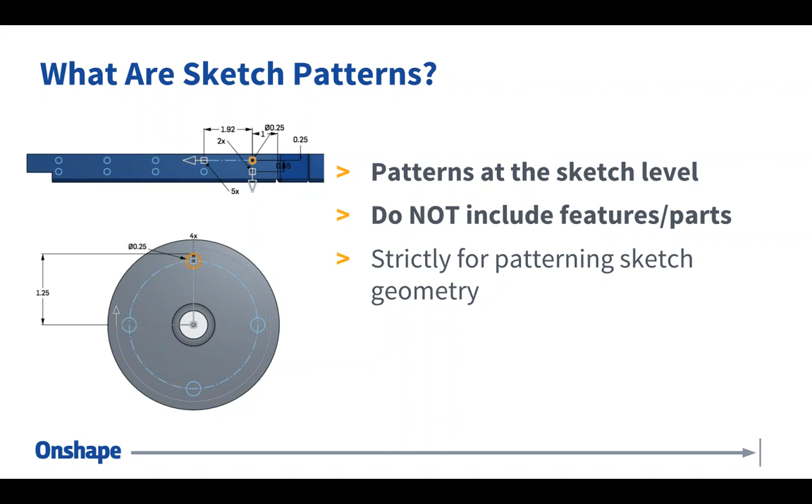It's important to keep in mind, though, this does not include, we're not going to be talking about patterning features or patterning parts. We have done a different webinar on that, so definitely check out our YouTube channel if you're interested in past webinars on patterns. Today, we're focusing solely on patterning sketch entities.

So, why would I need this? And the question is valid, and it gets asked a lot: why would I use a sketch pattern versus a feature pattern, or why would I use sketch patterns at all? I think for a lot of users, they want to be able to repeat not the feature, but the actual sketch entities that drive them. And anytime you need to repeat sketch level geometry, you're going to need a sketch pattern tool of some sort.

Now, it's important to point out a lot of what I'm going to show you here today can also be used, could also be created using a feature pattern. And there is a lot of overlap between the two, a lot. So I would say for many users, it boils down to, in many situations, a matter of preference. Having everything in a sketch, a lot of users like it that way, and therefore use a lot of sketch patterns. But understand that, again, if you need to repeat geometry at the sketch level, then sketch patterns are the tools you're looking for.

And I think the real thing is if you find yourself manually sketching the same thing over and over again, or similar shapes over and over again, and find yourself positioning them and rotating them and doing all these things to try and get them in the right spot, chances are there's a pattern tool that will allow that to be faster. It'll make it a little bit quicker.

So, question: as in CATIA and others, I assume you may be referring to sketch patterns, and sketch patterns are a common thing in many CAD applications. CATIA, SolidWorks, Inventor, almost all professional 3D CAD applications have some level of sketch patterns, and I'm sure if you have familiarity with one of those applications, a lot of this is going to look pretty similar.

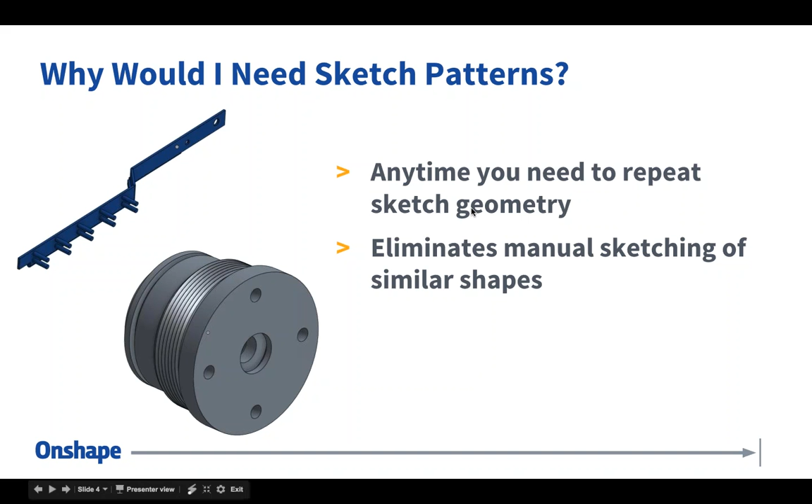Do sketches have their own extensions? If you're referring to file extensions, the answer is no. There's no files whatsoever in Onshape.

So what commands are available to us? There are a few things we're going to use for patterning geometry, and I've already mentioned the first two. The most common are going to be linear and circular sketch patterns. Like the name implies, it allows you to pattern a sketch entity in a linear direction, or pattern a sketch entity around a cylinder or in a circular pattern.

Now, the last one I want to mention, which is very valuable, is mirror. Mirror is particularly valuable if you need to mirror sketch geometry across—not necessarily patterning it, but you want that symmetric behavior in your sketch. I wanted to mention any way we have for recreating and reusing sketch data, so let's dig into it.

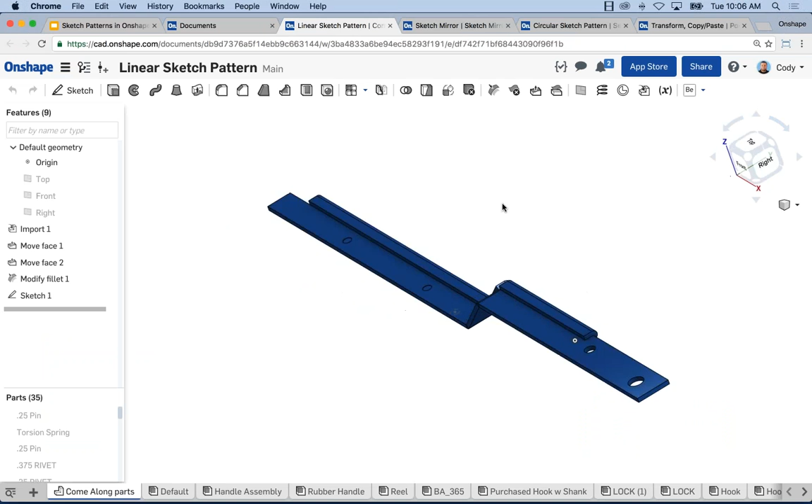Now, the first thing I want to show is a linear sketch pattern. Okay, so we'll start with this simple arm. What I'd like to do is take a hole that I want to cut and pattern it all the way across this arm at a certain distance, a certain spacing, and so on. So let's discuss it now.

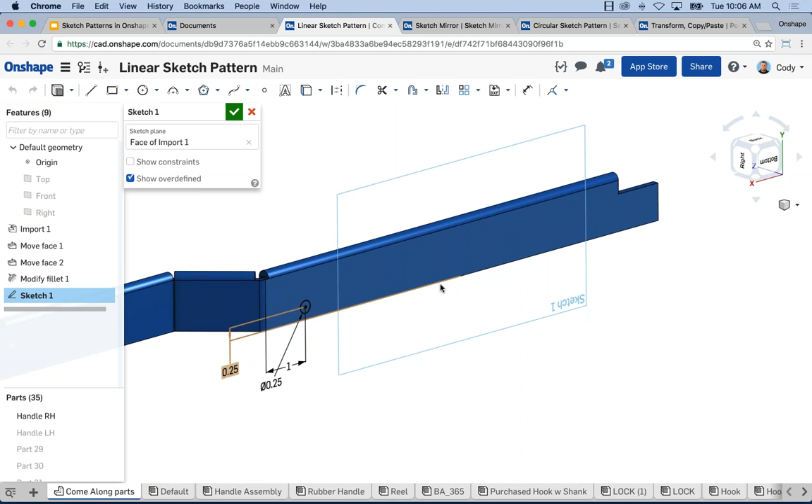I'm going to edit the sketch, edit sketch 1. You'll see it's just a simple circle located relative to this corner. I'm going to take this circle and create a linear sketch pattern, patterning it across the arm. There are some unique advantages to doing this at the sketch level versus the feature level, so let me give you a quick example.

I want to do a linear pattern. You'll find linear pattern, circular pattern, and transform all in the far right of the sketch toolbar here, and it's very simple. You select linear pattern, then click on the things you want to pattern—in this case, just the circle.

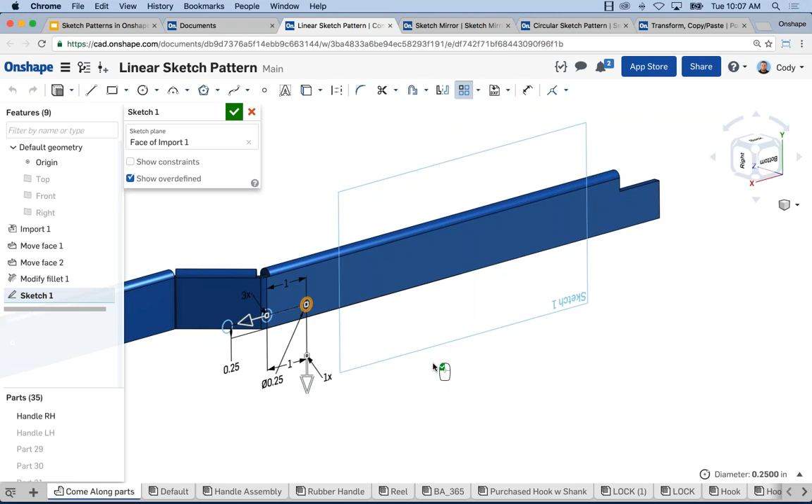Now, immediately when you select the geometry you want to pattern, you're given these arrows and a preview of the pattern. You can see my direction is going this way, and I have a second direction down here, but you can grab these arrows and move them. You can see there are a few details that pop up when I do that.

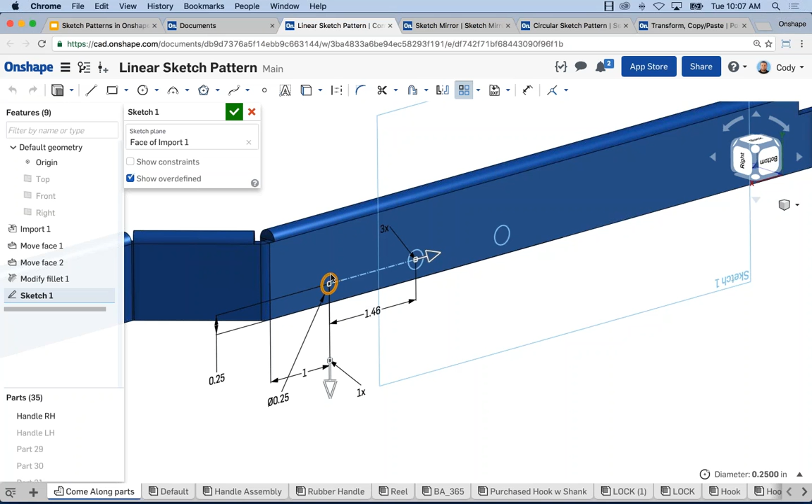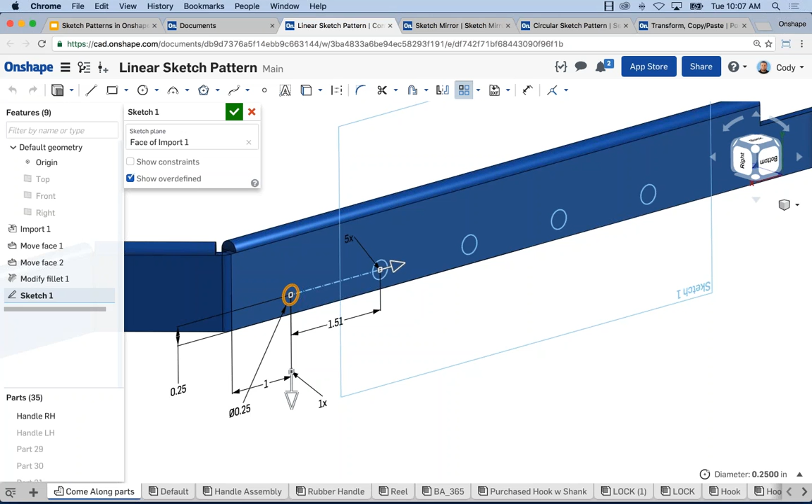First off, I have a dimension here, and a number of instances—3x, a pattern of 3. By the way, that does include the original, a frequently asked question. I have this drag arrow manipulator that I can grab and drag to change the distance between instances. I can also double click the number to change the number of instances in the pattern very easily. So again, the idea is just simple spacing between each instance and the number of instances.

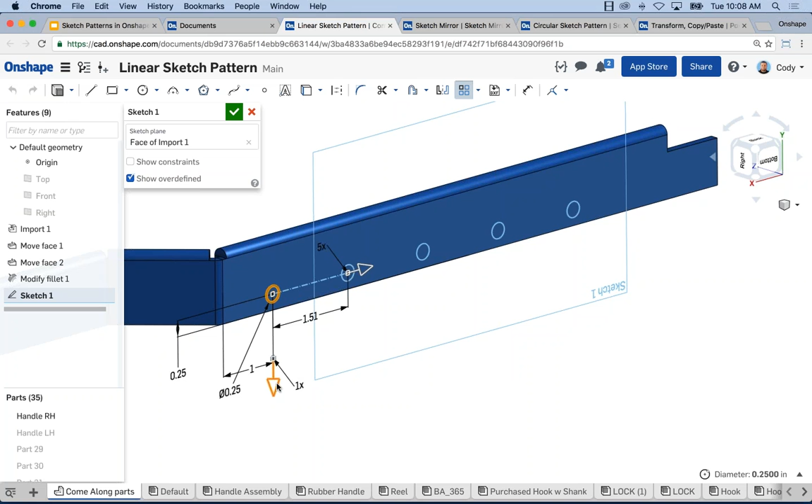Now, a few things I want to mention here. If I want to go a second direction—another commonly asked question—if I want to take these holes and pattern them in a second direction, I want another row of holes, so to speak. How would I do that? By default, in the linear sketch pattern, you also have a second manipulator, a second drag arrow going in the opposite direction. If you left click and drag this, it will assume you want more than one instance in that direction and will pattern those as well.

So a tip if you're looking to go in both directions with your sketch patterns: grab both arrows. The moment you click and drag that second arrow, it will assume you want a second instance to your pattern. That's the basics—you establish a spacing between instances and a number of instances in both directions. So I can set a simple 1.5 between each instance and 5 instances, and then I'm there. But there's a lot you can really do here that's particularly powerful.

This is, I think, what a lot of users are looking for—just a simple way of saying this distance, this many instances. But there's a lot more intelligence you can build into this, and I want to point something out here. As I start to get into bigger and bigger numbers, this may not necessarily behave the way I'd expect. You can see it's just using a fixed distance and instance count.

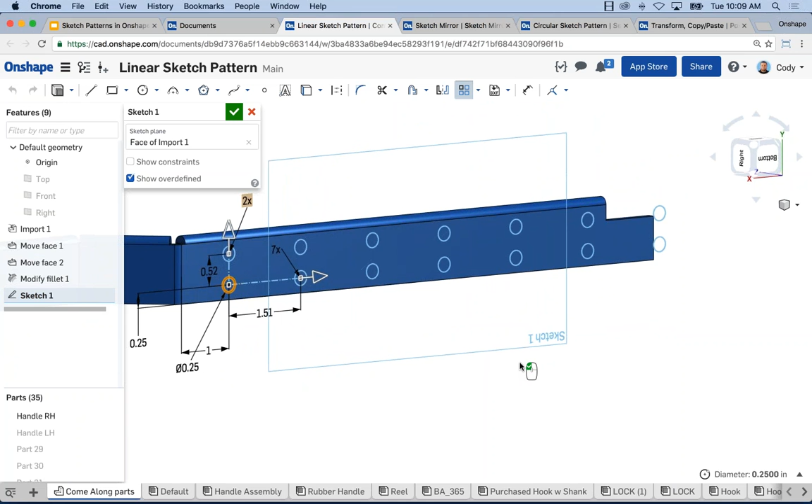And as I go to 7 instances, all of a sudden there are instances out here in space that aren't going to have an impact or cause some feature to fail. So what I want to point out here is there's a few ways that you can drive these patterns.

Let me show you an example. We'll drag this out again. Let's say that I want 5 in both directions. Now, same exact pattern as a moment ago.

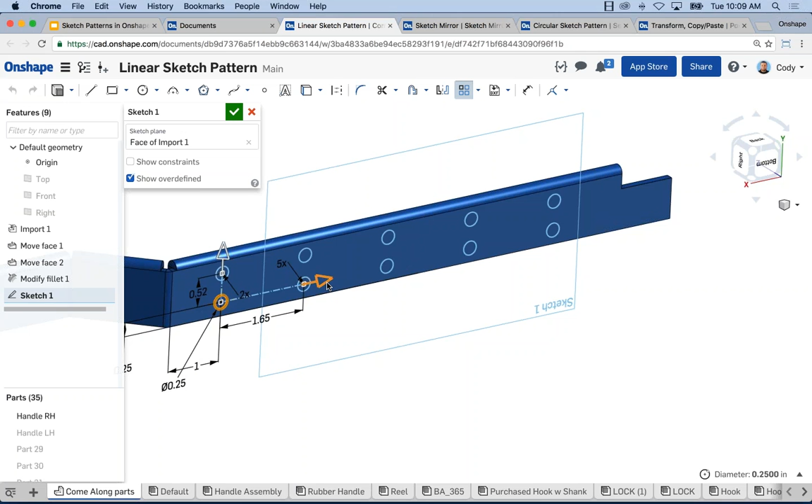What I want to point out, though, is probably one of the most important tips that I have: make sure to accept the pattern. Left click to accept it. That's a step that's easy to miss. In the linear and circular sketch pattern, the last step to accept either pattern is to left click in empty space. You'll see a little visual cue of that, and I'll show you this again in just a moment.

Make sure once the pattern looks right and you have the values you want, left click to accept it. Now, the reason I bring this up is you can change this afterwards.

So for instance, I can delete the 1.65 and dimension relative to this other end, and say this should be 2. The spacing will remain the same. So now instead of driving it by a dumb number, just 1.5, I'm saying I want 5 instances of these holes, and I want the end spacing to be 2.

Oftentimes that's the thing you want to control, not necessarily the spacing between instances, but making sure there's a gap or distance from the edge of the part. You can see as I change this, all the pattern instances will shift, so it's still maintaining that pattern. I'm just not driving it by the distance between holes — I'm driving it based on the end distance of the pattern.

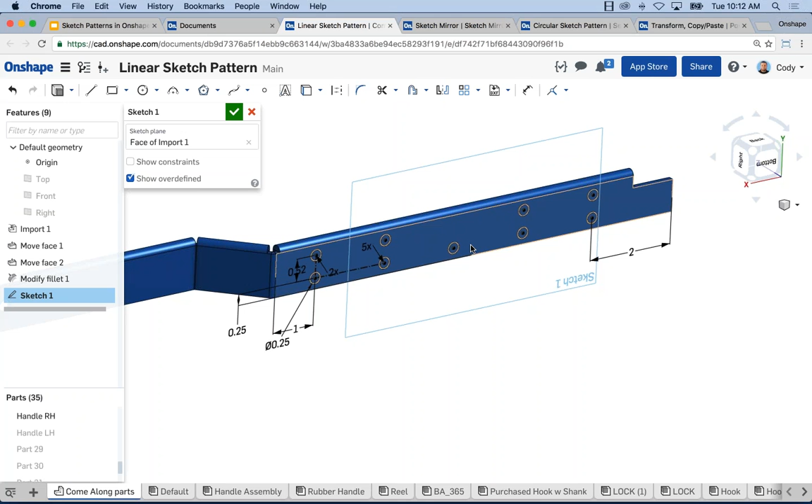So again, you can treat them independently. Just window selecting and deleting does not impact the entire set. So if I change that distance, you'll see all the holes shift over, except for the one that I deleted. That's an important thing I want to point out.

Again, you can drive the sketch pattern by more than just a simple distance and instance count. You can drive it by the edge of the part, for example. So just keep that in mind.

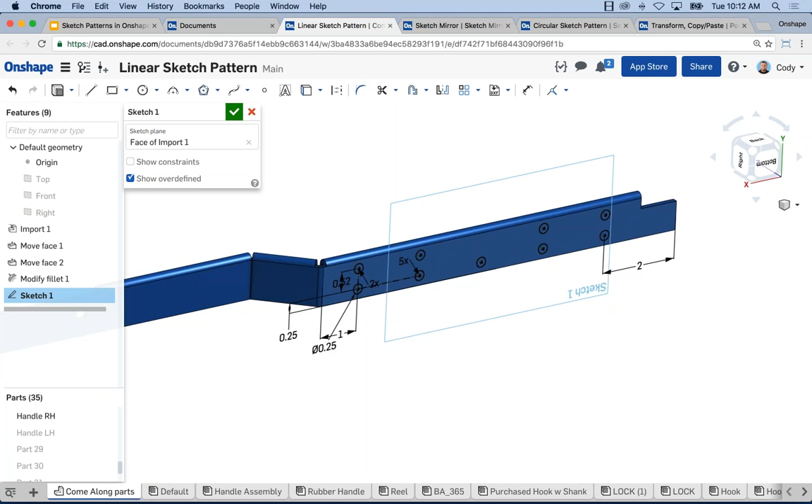Now, another thing I always like to mention — let's go ahead and get rid of these pattern instances — is let's say I don't necessarily want perfectly linear patterns, or I want to align it with something. So if I do that same linear pattern, let's grab and drag this way as well. You have these arrows that allow you to establish direction, but you also have these squares at the end points of them, and you can grab these and manipulate the geometry further.

So I can grab these points and manipulate, flip back and forth, and shift the pattern along a different direction, maybe along an angle, going down. Remember, these are just lines. So if I left click to accept this pattern, I can then constrain this line or dimension it relative to something, and that will control the pattern.

So you have the ability to create patterns at different angles just by grabbing those lines and manipulating them, constraining them just like you would any other sketch entities, and attaching it to whatever you'd like. By default it will go back and forth along the X and Y axis, but you can grab those squares, manipulate and change the direction, and align the construction geometry to something else that makes sense in your design.

So again, just trying to drive home: you're not forced to go up and down, so to speak, or along the X and Y axis.

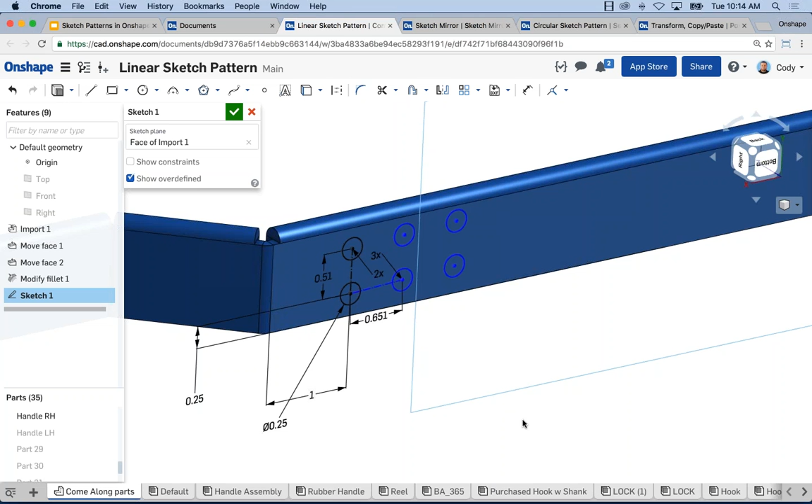It's any direction that you'd like. So that is the linear sketch pattern, and a few tips that I have for working with it. I see a few questions, so bear with me.

Is the linear sketch model convertible to other CAD software? You can export as a DXF. I'm not sure what other CAD software you're looking to go to, but you can export any sketches as a DXF, yes.

Can you create the pattern with a distance from a different feature from the initial pattern? Do you have to accept it and then edit? You have to left click to accept it, but then just delete the dimension that drives it and change it to something else, like the example I showed you. By default, it will assume that you just want a certain distance between the holes and a certain instance count, and I think that's what a lot of users are looking for. But yeah, you have to left click accept, delete the dimension that drives the distance, and then replace it with something else.

Question: can you drive the pattern by a total length of the pattern? Yeah, you should be able to select the two end points of the pattern. I can try that in just a bit, so bear with me. I know you can drive it relative to other geometry. I haven't tried end point to end point, but I don't see why it wouldn't.

Can I get the deleted item back? Oh, I'm sorry. When you delete an instance of it, the only thing we would have there would be an undo. So the undo in the top left, or Command Z, Control Z, or whatever it may be.

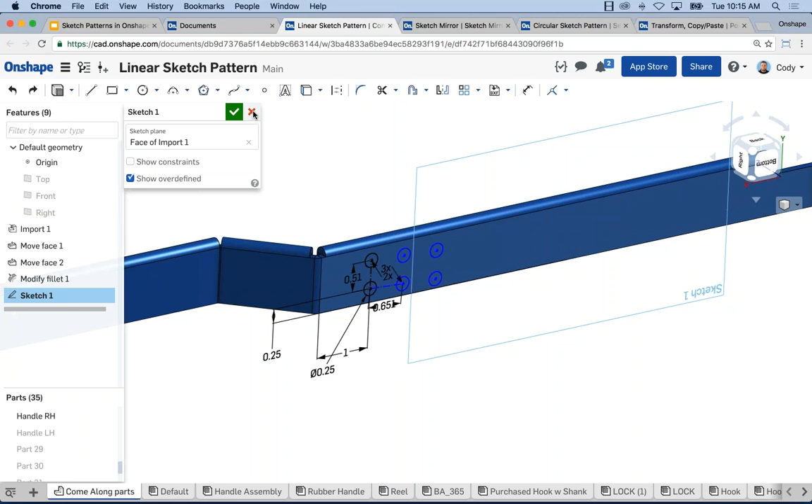So that is a simple example of a linear sketch pattern. What I'd like to walk you through next is an example of a circular sketch pattern. Let's jump into that. The big thing here is, instead of patterning in a single direction relative to some reference, I'm rotating sketch entities around an axis.

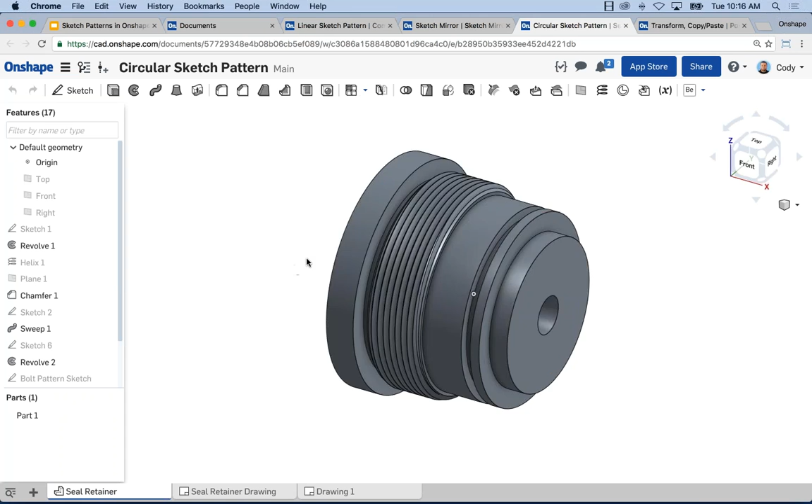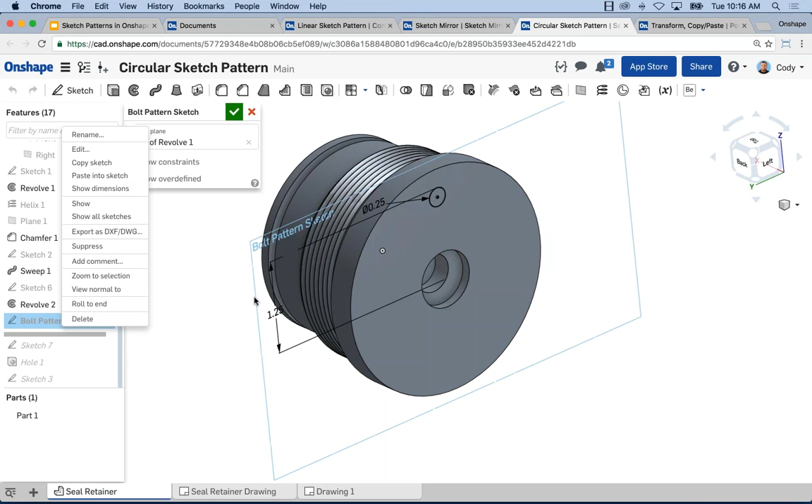The example I often give is a bolt circle. Oftentimes users have a scenario where they have a 4-hole bolt circle on the back of a part, maybe for a spanner wrench, where they need to define 4 evenly spaced holes around a circle. Let's walk through this. I'll edit the sketch, and you can see right now it's just one bolt circle. I need to pattern 3 more of these to get a total of 4 evenly spaced around this cylinder. Real simple, I start with a circular pattern, same place where linear pattern was just a moment ago.

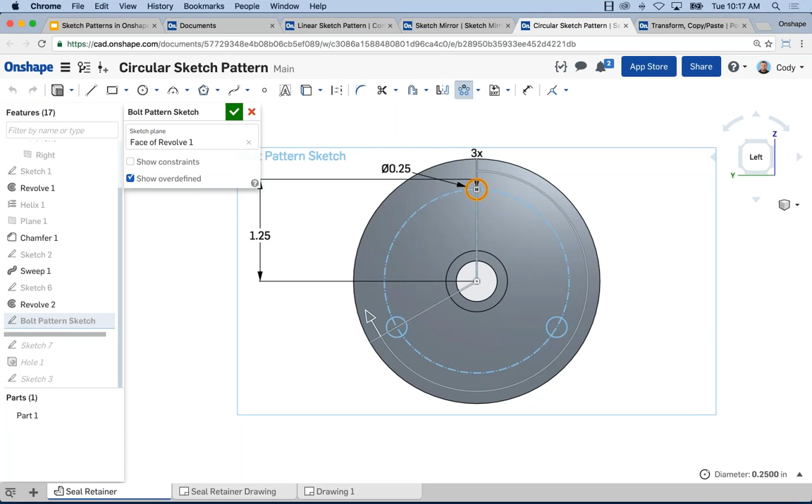Right underneath it, you'll find circular pattern. I left click the geometry I want to pattern, and you'll see immediately I get 2 more holes for a total instance count of 3. Now, a few things that I want to mention.

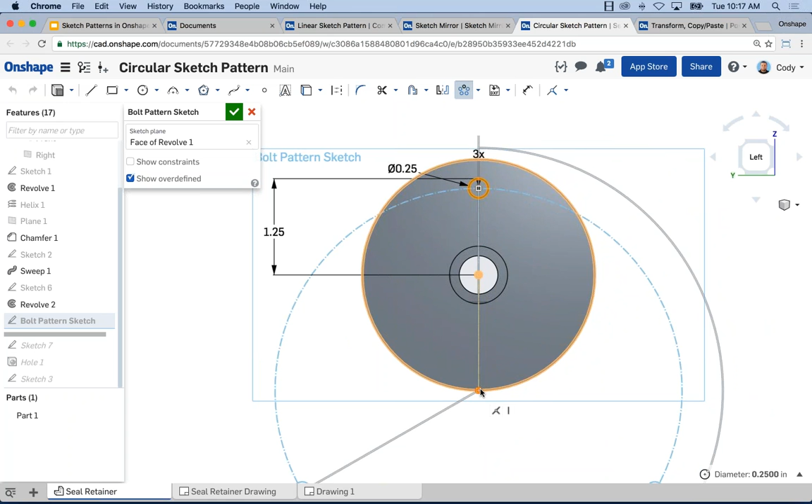By default, when you do any circular pattern at the sketch level, it's going to assume that the center of that pattern is the origin. But you can grab this and move it anywhere you'd like. So by default, it's assumed the center of this pattern is the origin, but I can move this around and say, okay, that's the actual center of my pattern. That's one of the first tips I want to point out — very important when it comes to positioning and fully defining the circular sketch pattern. Make sure to grab that center point of the pattern preview and move it around until it's attached to whatever it should be attached to.

Then, of course, it's no different than before. You can set your spacing and instance count — in this case, I want 4. Remember, all of them include the original, so now I have 4 evenly spaced holes for my bolt circle.

Now, the question often comes up: by default, it does 360 degrees, but what if I don't want 4 over 360 degrees? What if I wanted 4 over 180 degrees, or something to that effect? The answer is you can change this. You'll see an arrow here, and if I left click and drag this, I can change this angle to anything I'd like.

So there's 4 over 270 degrees. By default, it will assume that you want to do a full 360, so evenly spaced over 360 degrees, but you can change that number to anything you'd like. Just grab the arrow, you can double click and enter the number into the dimension here, and that will drive your circular sketch pattern.

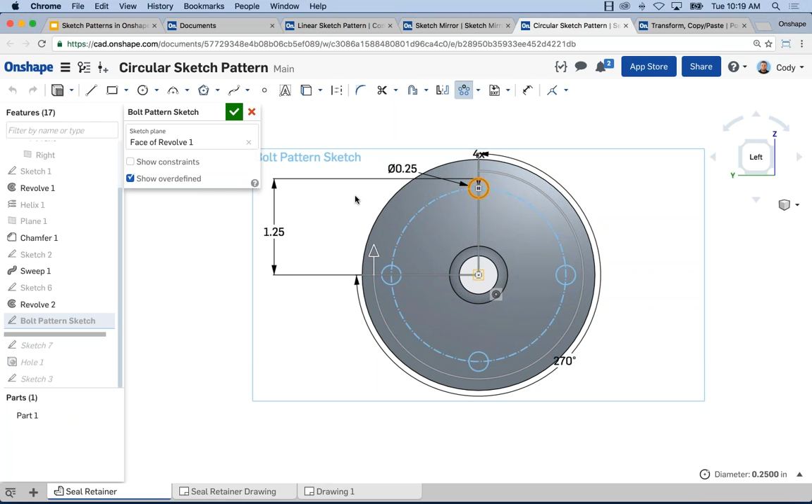Okay, so a big tip, you don't necessarily have to define over a full 360 degree pattern. Now, I mentioned this before, and it's also important here in both linear and circular sketch patterns: it is very important to left click to accept them. That's the final step in the pattern. You'll notice if I just hit escape or any other button, I lose out and get out of that circular sketch pattern command.

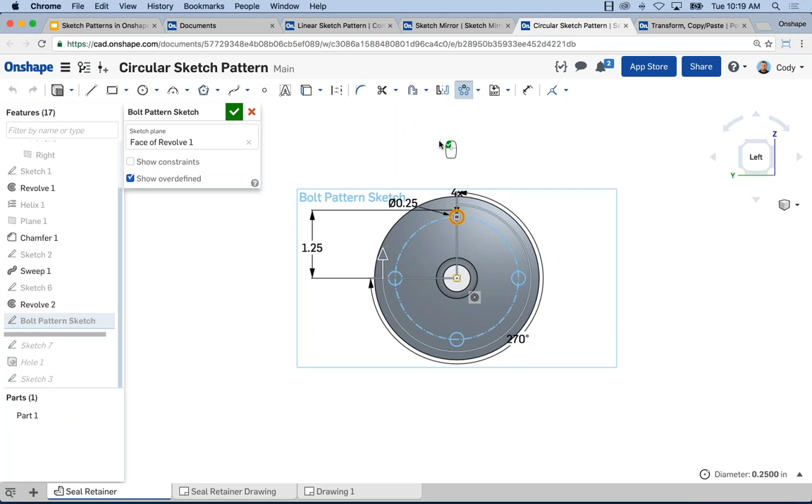So in the dialog or in the graphics window, you'll see a little mouse icon, and the left cursor, the left button there, is highlighted. So left click, that accepts the pattern. Okay, very important last step. I think a lot of new users can miss this in both linear and circular sketch pattern. Make sure to left click that one last time to accept everything.

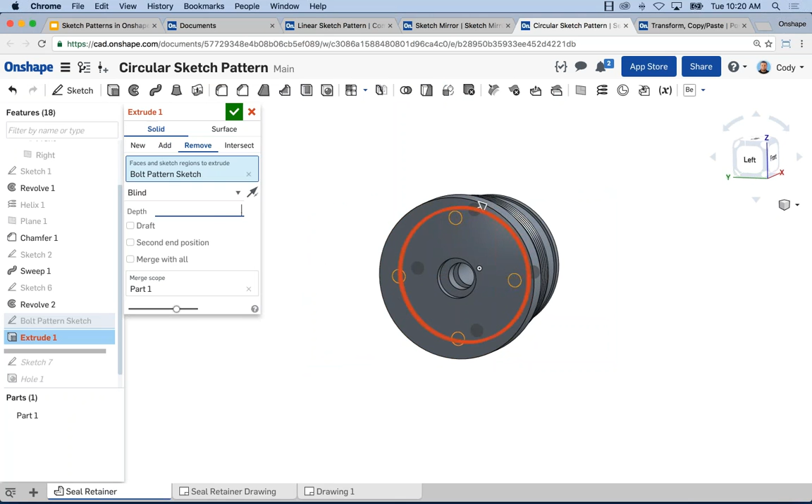Now I can go from here, of course, do extrude, remove, let's say 0.25. Okay, and now I've added my bolt circle.

So just trying to drive home again, circular sketch pattern, make sure to move that center point to a position that makes sense for you. By default, when you do a circular sketch pattern, it's going to assume that the center of the pattern, the rotation point of that pattern, is the origin. And chances are in your design it may not be, so you may have to move that around and position it as such.

But otherwise, very simple. Again, you can pattern over a full 360—that's the default—but then you can also pattern over any angle that you want.

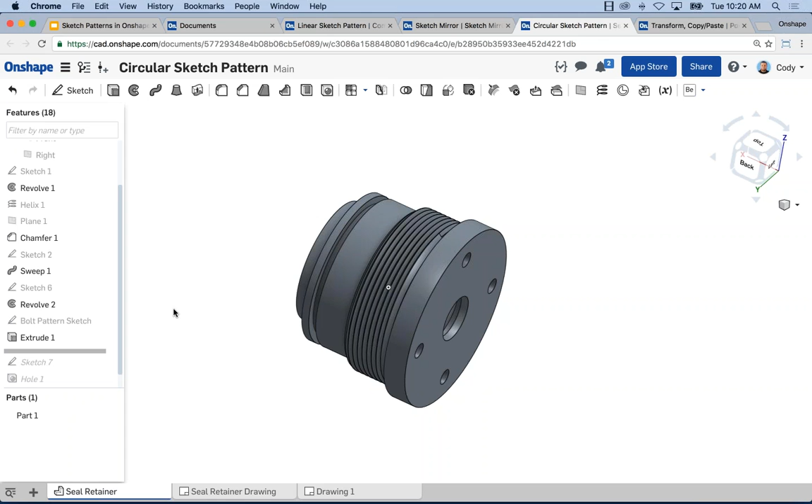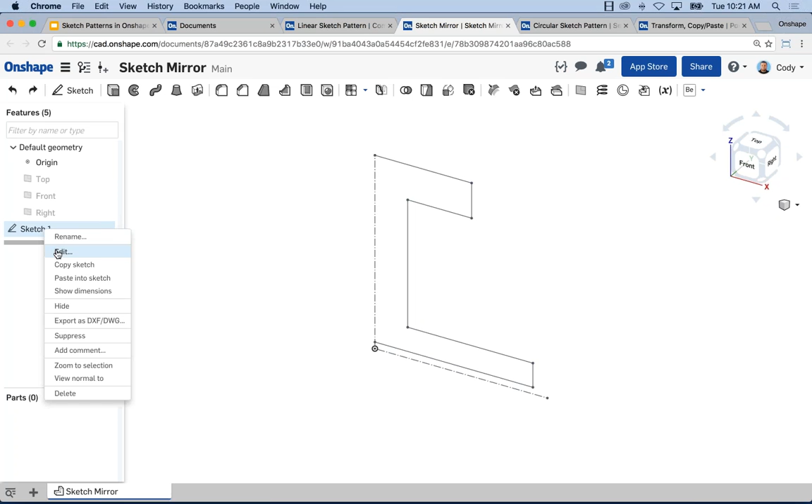All right, so we've discussed linear sketch pattern, circular sketch pattern. The other important piece to recreating geometry very quickly is the mirror command. And the mirror command, while just a bit different than patterns, is a fast way to create a lot of sketch geometry. It's a technique that a lot of users apply because it also gives you symmetry in your sketch. The example I always like to give is if I'm designing a revolve profile, maybe this is a pulley of some sort, and I need to start defining the actual symmetry between my profile.

I want to make sure that this half matches perfectly with this half. They're symmetric about the middle. And the way we accomplish that is with a mirror. Now, mirror is very simple.

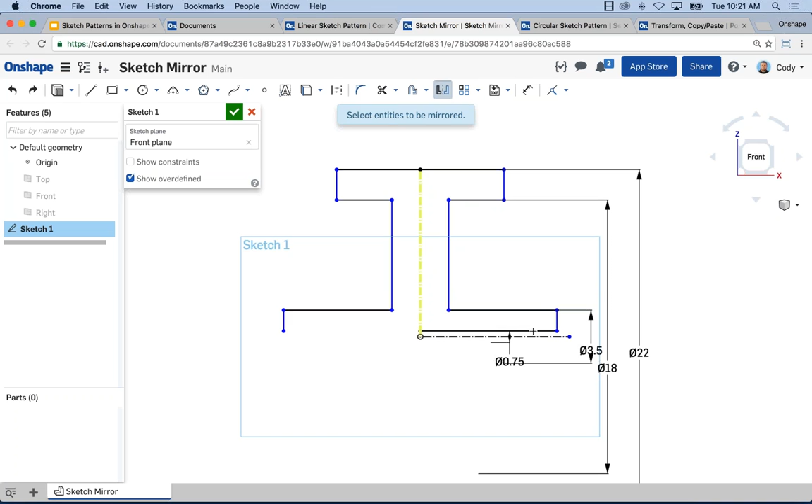You select mirror, you click the line you want to mirror about, then click on anything that you want to mirror. You can window select, so if you have a lot of geometry, you can do it all at once. But very simple: select your mirror line, select any entities that you want to mirror.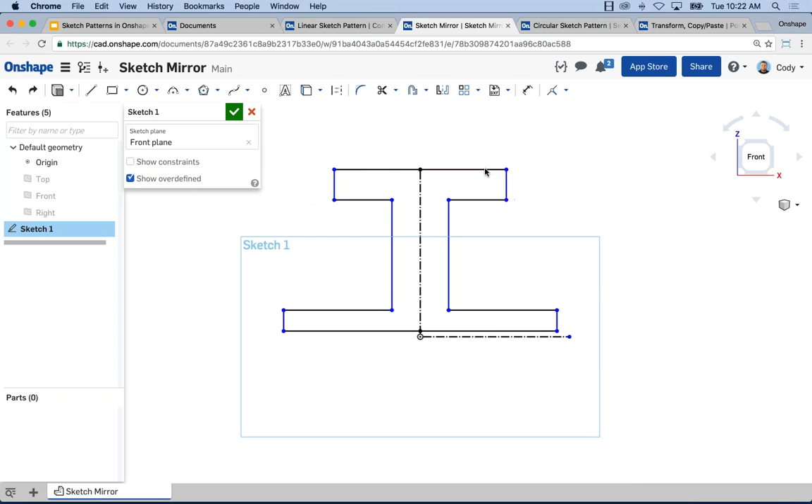So the big thing this gives you is now when I change the length, for instance, on one, they both update. I get that symmetry behavior between the sketch entities. Now you can recreate this using a symmetric constraint, but I think a lot of users like the ability to mirror geometry over and get that symmetry experienced with it.

So that is a simple example of mirror, but very easy to use. Select your mirror line, select anything that you want to mirror, it will mirror it to the other side. You do get symmetry between the entities after they've been mirrored.

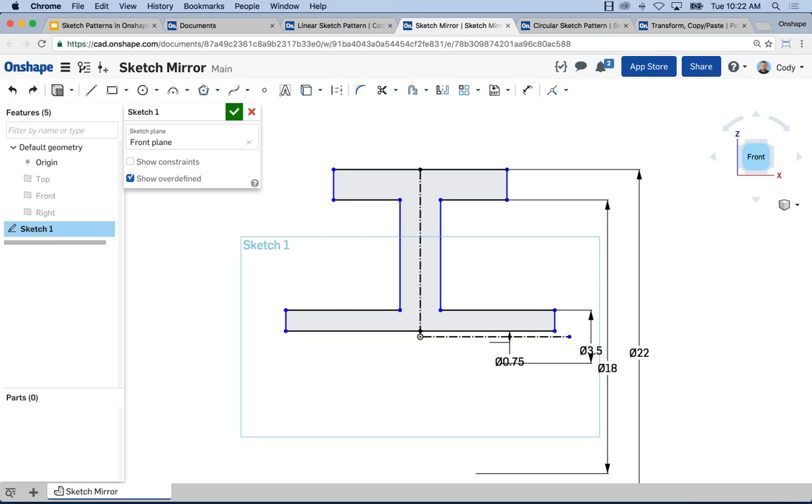So right underneath linear and circular pattern, you have transform. And here I have a sketch that's fixed, it's completely defined. I want to take this sketch, shift it over, and rotate it.

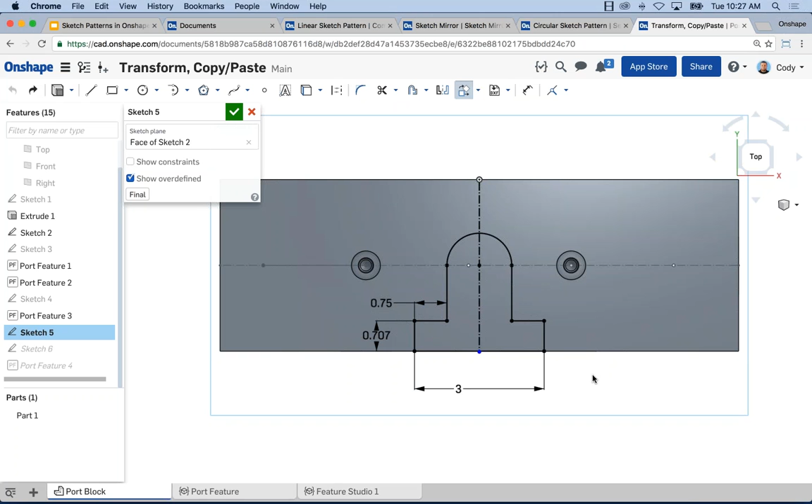I can select transform, select the geometry I want to transform, and you'll see the manipulators. I can grab, drag, rotate. There's 90 degrees right there. And so I can manipulate this geometry. Again, even though it was fully constrained in its current position, the transform command allows me to then move it.

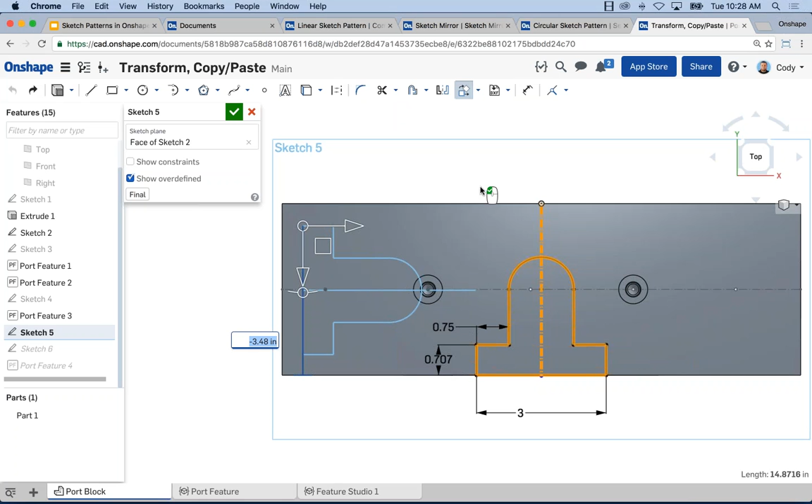It will automatically break any constraints that were causing an issue. And when I accept, it's easy for me to go back in and position the geometry the way I want, and add the constraints that I need. So that is the transform command.

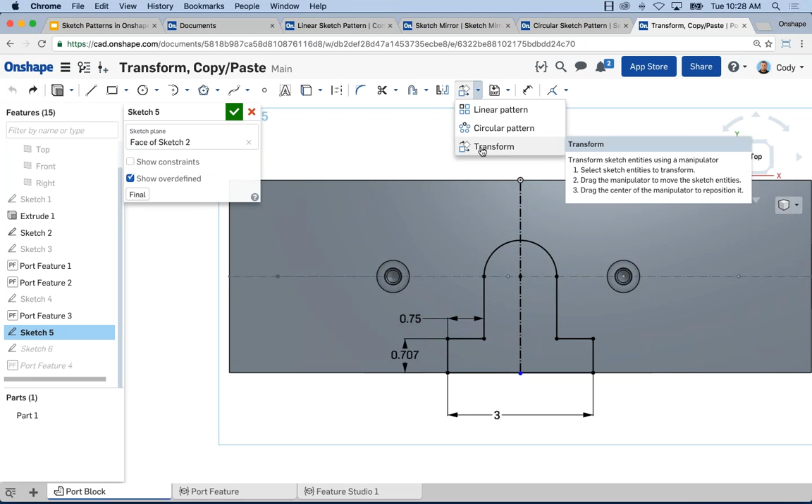You'll find it under linear and circular pattern right here. It's just a matter of window selecting the sketch entities that you want, and then using the manipulator, drag, arrows, and rotation to rotate and move it. And I know it's not a pattern, but it's under the pattern tools, and I think it's common for those doing a lot of patterning. So that's transform, and that's one of the ways to position a sketch.

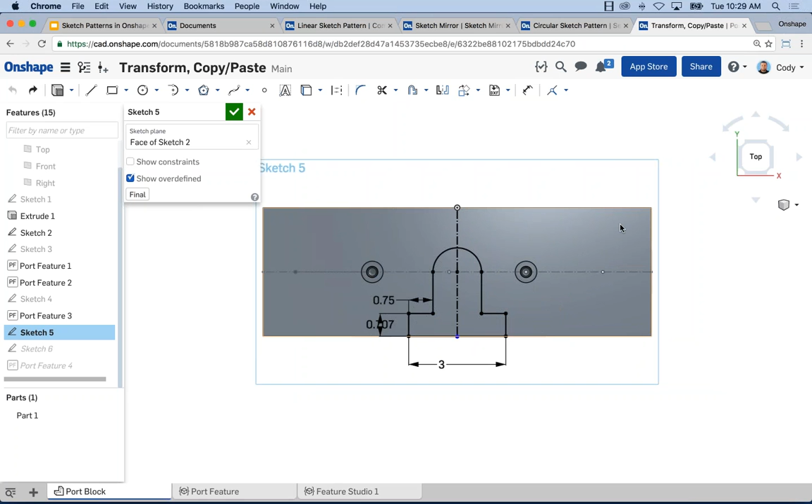Now, the question often comes up: well, what if I wanted to copy this sketch and paste it onto a different plane? Or what if I wanted to copy this sketch and paste another instance over here somewhere, even within the same sketch? So there are two techniques, and I mentioned them: copy and paste sketch, and copy and paste sketch entities. Let's go over copy and paste sketch first.

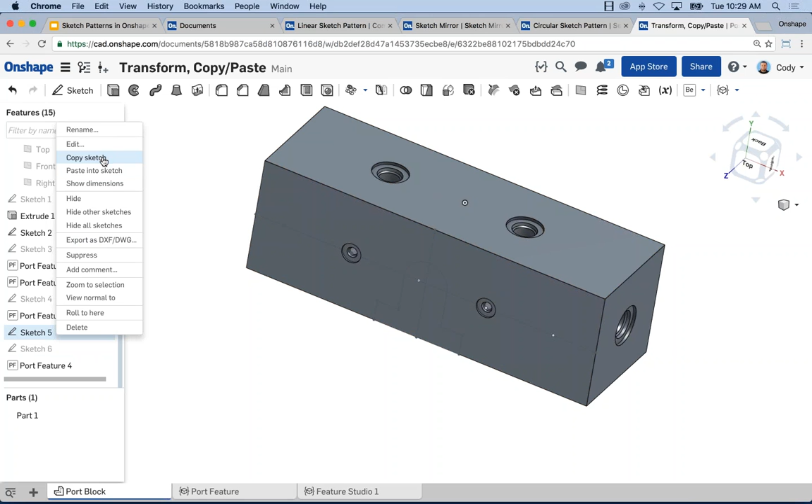I'm going to accept this. Let's just say hypothetically that I want to take this sketch 5 and paste it onto this face. So I right click, and you'll see in the right click options a copy sketch. Right click copy sketch, right click a face or any plane for that matter, and you'll see paste into sketch.

Now, it's not going to come in the correct orientation, and this is where transform and constraining it are going to be useful. But now I have that sketch where I can do a quick transform, rotate it around, whatever it is that I'm trying to do. Maybe just attach the end to the edge of the part here.

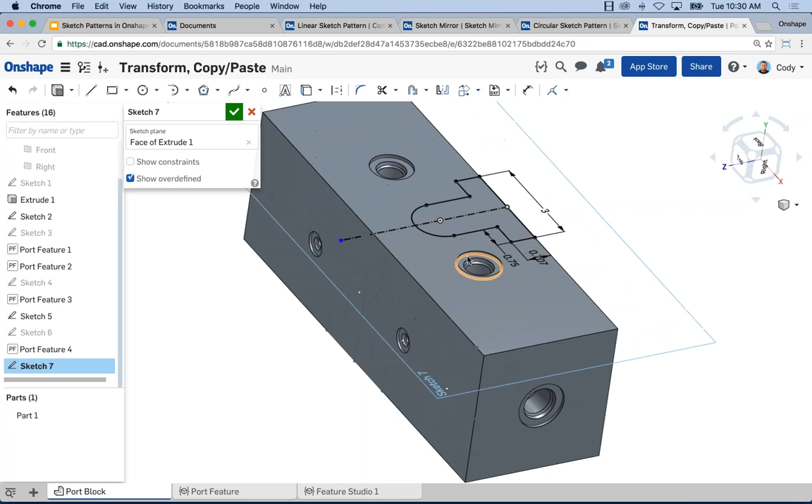Okay, and bring these two together. Remember, it's not constrained to the original. So this is now an independent sketch that I've positioned. It just happened to be copied from a past sketch. So, green check, OK. Now I've copied this sketch onto this face.

Again, not linked in any way, but a useful way of reusing sketch entities. Right-click copy, right-click a plane or a planar face, and choose paste sketch. All right, so that's copy and paste sketch.

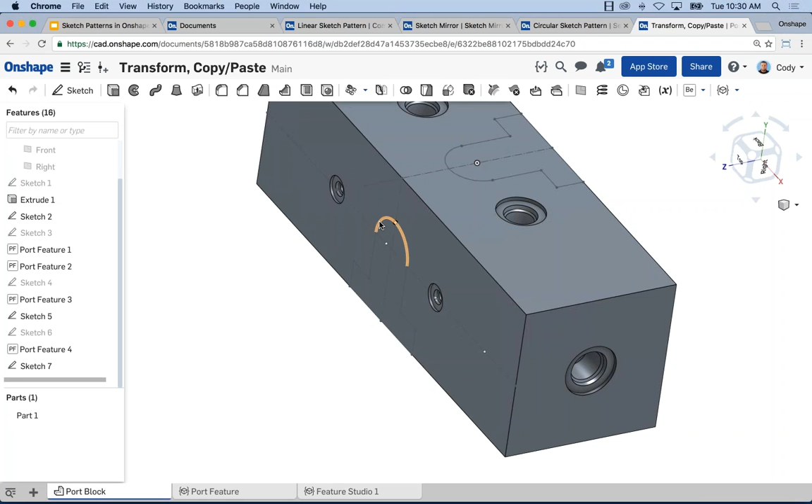Now, the last thing that I wanted to mention here today is copy and paste sketch entities. This is particularly important for users that are looking for something that may not necessarily be an evenly spaced pattern, where you have geometry and want to pattern it, but in kind of random positions, nothing clearly driving it.

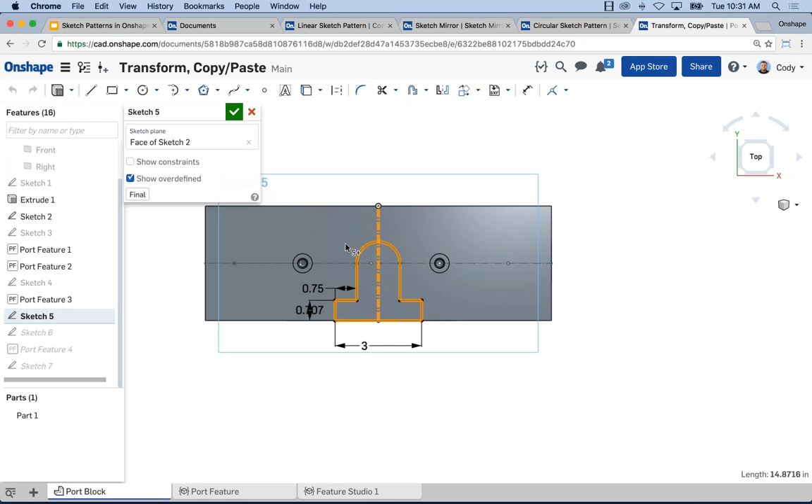The way you can accomplish this is just selecting the things that you want to copy. Right click on it, and you'll see copy sketch entities. Then right click where you want to paste those sketch entities, and you'll see paste sketch entities. Now, as soon as you do this, it assumes that you also want to transform.

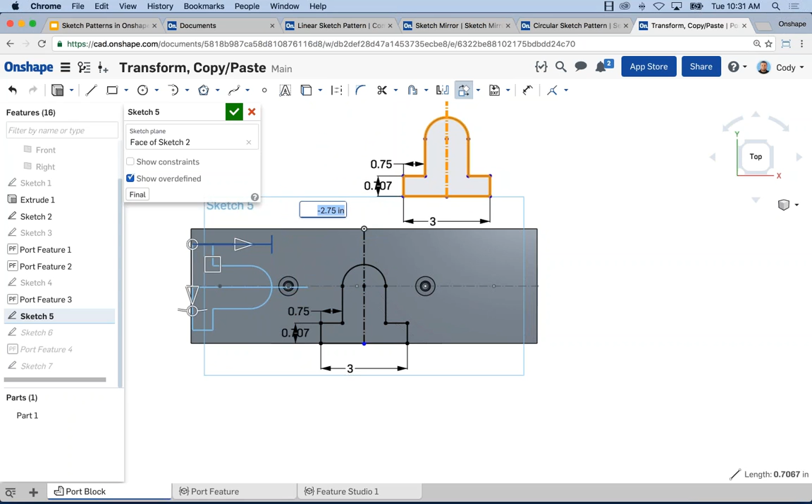Immediately after you paste, you're going to see these transform arrows, which give you the same transform capabilities we were looking at a second ago. This is the same command, but it's just built on top of copy and paste. It's a useful way for me to say, okay, there's a copy of that rotated over 90 degrees and shifted. Now I can come in and add the constraints that I really need to attach this.

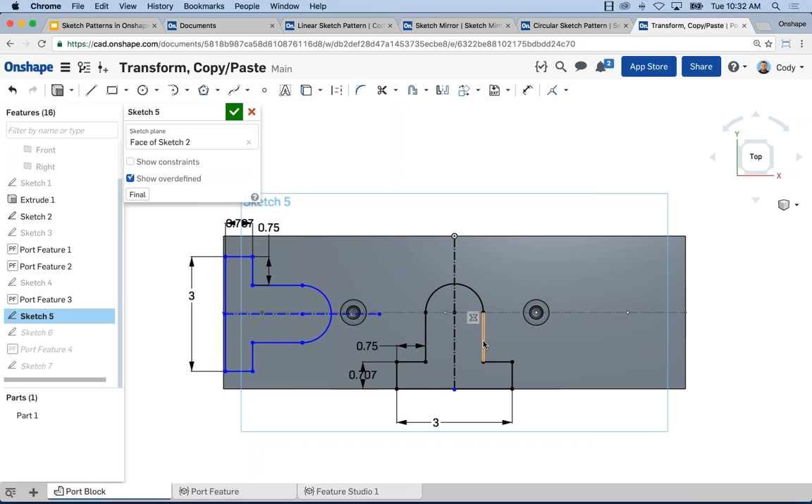So just keep in mind, copy and paste sketch entities will give you scenarios where you are reusing the sketch to a certain degree, but it's not necessarily something you could easily circular pattern or linear pattern. I just reuse the same kind of profile in different places. Copy and paste sketch entities is really big for that, and I definitely recommend it if you're doing any kind of manipulation, reusing that same series of sketch entities over and over.